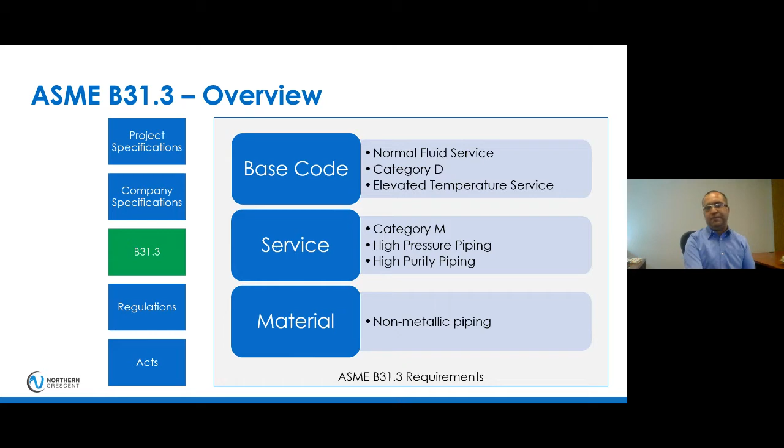Anything that is not fitting into any of these categories will go into the normal fluid service, and that will represent about 60 to 80% of what we are dealing with. There are very few services that will fall in category M, very few that will fall in category D, and so on. So the majority of requirements applicable to normal fluid service, category D and elevated temperature services are lumped together and put into the base code. If we look at it the other way, we can look at the way the code is written.

So everything that is in chapters 1 to 6, that is the base code, and that involves everything from definitions to the design, and design will cover the piping design, the components design, the joints design, and the stress analysis. Similarly, chapter 3 will cover the materials, which is mostly for impact testing requirements, and try to avoid any brittle failure so that the material fails in a ductile way, so that there is a warning for people to look at it and, if there is an imminent failure, they can do something about it. At least they're able to shut down the piping systems.

Then there is standards for piping components, and this is a fairly short section of the code. It's just a list of the fabrication and manufacturing standards that are referred to in B31.3 and are determined to have a consistent design basis with B31.3. So you can use these components without doing much more calculations or rating verifications.

Then there are fabrication, assembly, and erection requirements that are mostly covering welding, post-weld heat treatment, preheat, and any other fabrication-related activities. Then chapter 6 covers the NDE requirements, how you're going to do different examinations, what is the qualification of the person who should be doing the examination, and different types of testing, whether it's pressure, hydro test, pneumatic test, or initial service test. And there are other tests too. And then any appendices that have been referred to in these chapters will form part of the base code. And these chapters from 1 to 6 will cover most of the services, which are category D, normal service,

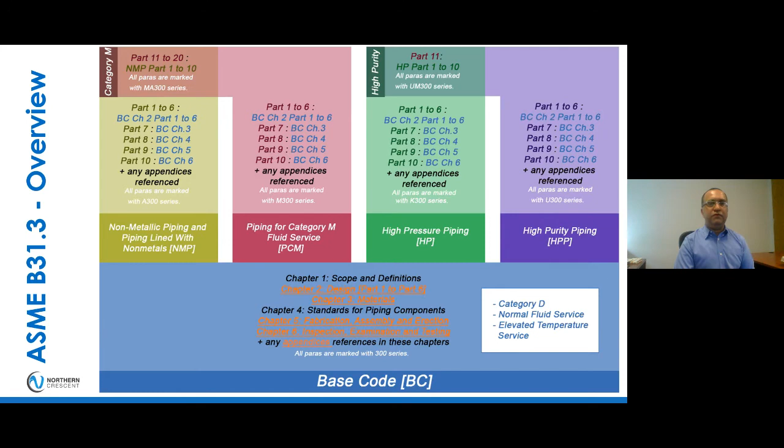Now, moving on to the other codes that you need to be aware of as part of complying with B31.3: B31P, which is mostly for heat treatments, and B31T, which is mostly for impact test requirements. Again, you want to avoid brittle failure of the piping systems. You want to give everyone enough time to react to a warning. You don't want to have an impact on a pipe and it cracks straight away while personnel are standing beside it and we have fatalities.

Now, B31E is a slightly dated standard, but hasn't really made it into B31.3 yet. That's mostly around seismic design for above ground piping systems. B31J now primarily covers all the inputs that we really need in stress analysis software for stress intensification factors and flexibility factors for components such as tees and, say, weldolets. Those are all covered in B31J.

And then there are some newer non-metallic piping codes such as B31 NM1, NM2, and NM3. Those cover everything that B31.3 Chapter 7 covers, but these codes are much more detailed than B31.3 Chapter 7 right now. In due course, you may see that they may be referred to in B31.3 in the next code revision or so, and then eventually replace B31.3 Chapter 7 in further revisions.

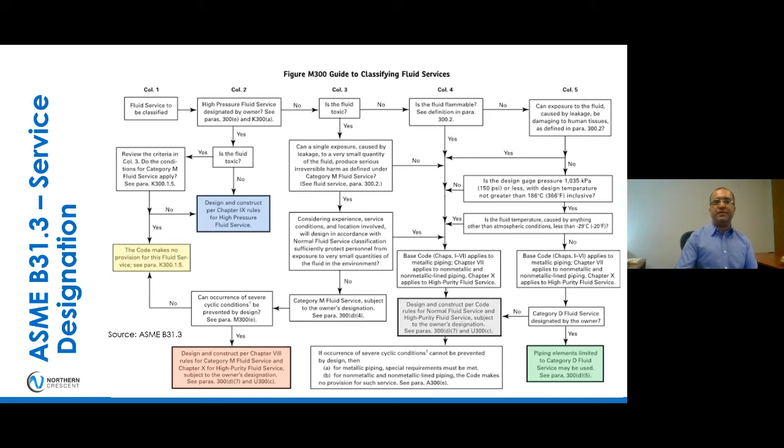Now, if we assume that somebody is just opening up an operating company and they want to do a new project, this is what tells them how B31.3 drives the conversation around requirements for different things, whether they are looking for a piping class, why the piping classes are needed, why stress analysis is needed, and why corporate specifications are needed.

You can see from this overall map that where you will start is with 2 things. You're probably going to start with a fluid service because you know that maybe I have an emulsion in my facility that I will be processing, or a gas. And you will probably have an idea about what kind of material you're going to use, whether carbon steel or stainless steels and those kind of things. And those are going to drive the conversation.

You know the fluid service, you put it in a piping class. Similarly, you know the material, you can then do the calculations for pipe, and then you can select the wall thickness. Again, you can put it through to the piping class. And similarly, you will have different fittings. You will have fittings that take the rating from your pipe wall thickness. That is your tees, your elbows, your reducers. And if they are made to B16.9, which is listed in table 326.1, it's a listed component, and you can just put it in your piping class.

Similarly, you can have fittings with rating, which could be a valve or a flange. If it's listed, you can just put it in a piping class. And you can have other fittings, for example, maybe a miter bend, a closure or maybe a specialty flange. There are some requirements given in paragraph 304.2 to 304.6. If it falls in that, you can just design to it. As long as it's a listed material, you can just put it in piping class.

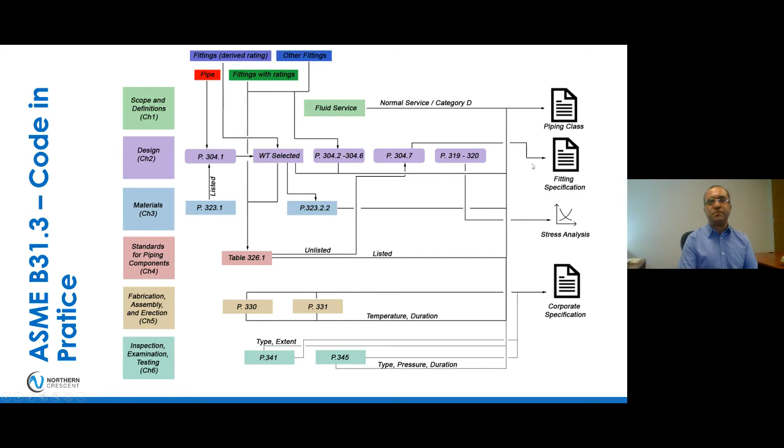Now, if any of these things is out of date, then I will request you to have a look at that, if any of these requires updating, because maybe the last time we did it, the piping class was 2010, and now there may be some significant changes between then and now. So with that, we will move into the B31.3-2020 changes.

The first thing is, again, related to the listed and unlisted components, things that we were talking about. So listed in any context, whether it's materials or components or valves, listed would mean that there is a standard listed for it, whether it's a material standard or a design standard listed in B31.3. It has a consistent basis with B31.3. If it's an unlisted component, that means that the design basis is not given in the code,

and these are unlisted valves. Just for completeness, I have given here all the list of the valves that are already listed in B31.3. So B16.34, API 6D, 600, 602, 608, 609. These are most likely to be the valves that you will be using. If you're using an instrumentation valve, maybe MSS SP-105.

And what really the change is, is that before there was a provision that if you have a valve that looks like a B16.34 valve, you can use one of the methods that's given in B16.34 and determine the pressure rating, because at the end of the day, the owner, the designer, is just looking for what this valve is good at for a certain temperature, right? So if you're going to 100 degrees C, you want to know how good the rating of the valve is. Is it good for 200 psi or 2000 psi? And that is now, I think, overridden.

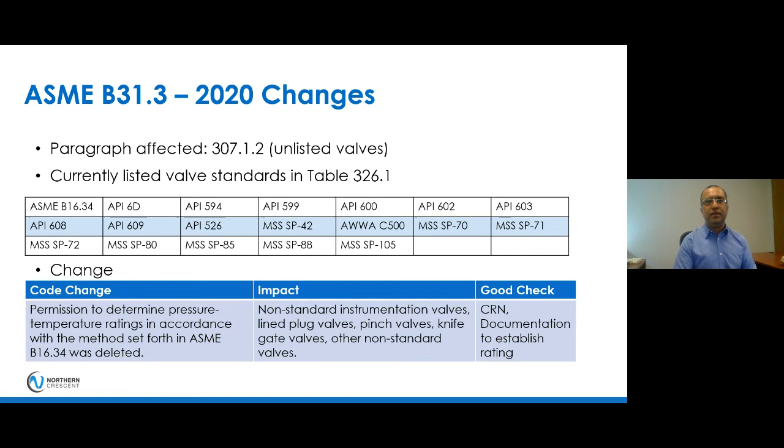Moving on to the other significant change, that is SIFs and flexibility factors. So right now, B31.3 has Appendix D, and whenever we do stress analysis, you will think about modeling a pipe. You model that pipe, and it's a cylindrical shape. It's simple, but when it comes to branches and other fittings, the simple models like Caesar and AutoPIPE need to know exactly how to deal with them.

You can think about SIFs and flexibility factors as imaginary numbers that represent the stress intensification of a component as compared to a pipe. Like how quickly it will fail if you are putting the same pressure and temperature on the pipe versus that fitting. If it fails much quicker, then you're going to say, well, this is failing 3 times quicker. So you're going to give a number which is probably 3, right?

And similarly, in order to correct maybe too much over-conservatism, you have flexibility factors where these tees, for example, have a certain flexibility. They may not stay rigid right in the middle. They will most likely be flexing when you put the loading on them. So those flexibility factors modify the rigid behavior of the piping system by a certain flexibility. So with these two combinations, you are able to accurately predict how the piping system is going to behave in a stress model. So the stress model is representative of your real life piping systems.

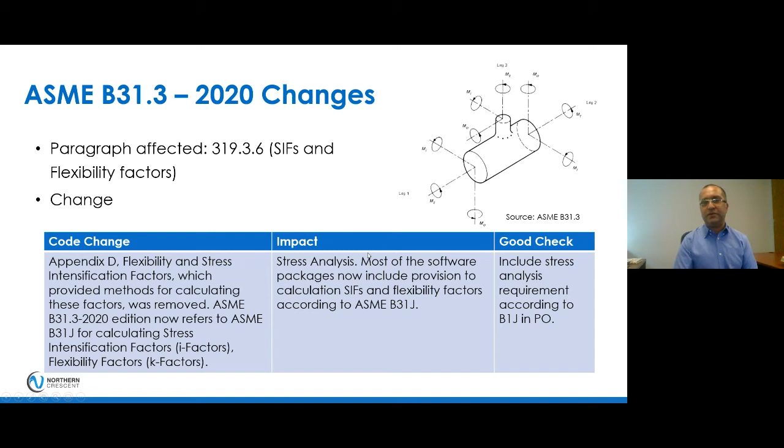The other, I think this is the most significant change, is impact test requirements for welds. There have been some background discussions around whether the impact test requirements for A106 and A105 are adequate or not, and from a printed book point of view, there is no change in how you were using A106, A105, curve B materials in 2018. Where things have changed is before, when your design temperature was warmer than the minimum temperature in the code, whether it's a straight temperature given in Table A-1 or given in a curve in Figure 323.2.2, you would be able to use the filler material and weld material. You do not need an impact test of that unless the temperature was colder than -29.

And the only exception there was if your consumable that you are using is already impact tested. So if your consumable is not impact tested, the one that you are using for maybe welding A106, now the limit is -18. And because the limit is -18, there is a good chance that you may need to do an additional PQR on that welding procedure to ensure that the -29 design stays. So you are not going to do an impact test at -18. That's the limit. You're going to do it at whatever your

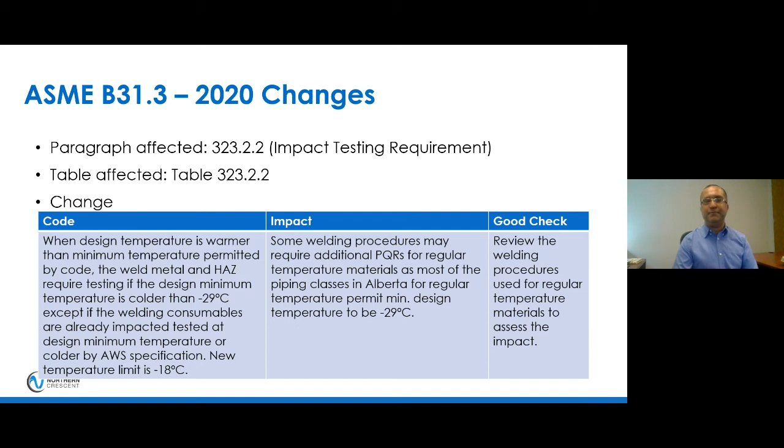design minimum temperature is. And most of the piping classes right now, for regular temperature in Alberta, are designed for -29. They're not designed for -18. So if you want to not change your piping classes and you want to keep those because they have been working well for you, then basically you need to add, not change completely, but add a PQR in your welding procedure that qualifies that welding procedure for -29 if the filler metal that is being used is not already impact tested by their AWS specification.

The other one is, again, related to the PQR. This is actually the other way around. This has made it much more streamlined. So in table 323.2.2, there was a number of tests for the fabricated welds, or you can say the field welds. Those number of tests, the requirement for how many test specimens you need through thickness, were different than ASME Section 9. So you could have a PQR that is done to ASME Section 9, but you may need yet more test coupons to qualify the same weld thickness that you're qualifying in ASME Section 9. You may need more specimens for that.

And it was felt that ASME Section 9 requirements were more than adequate for impact testing too, as they are for the weld thickness. So we can use ASME Section 9 thickness, and it took some time, but eventually we got there, and now they are the same. Now, if you are doing a welding procedure compliant to B31.3, you just need to follow ASME Section 9 requirements for weld thickness coupon and impact thickness coupon. So they're much more streamlined. If it was being missed, now it's not a concern, but if it was being done, now it's probably going to give some savings.

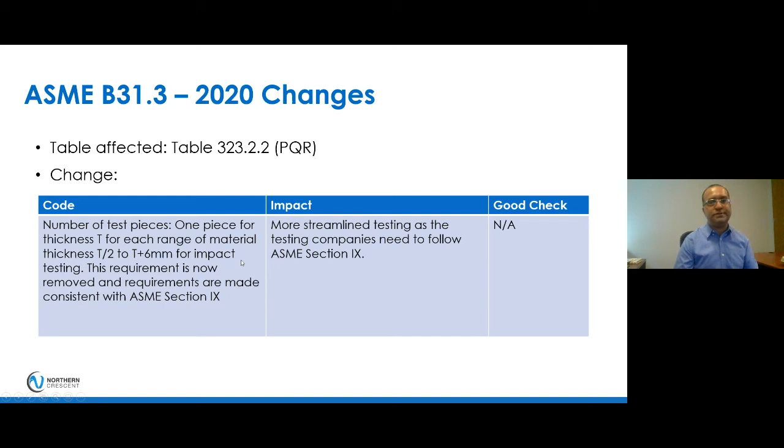Another, I think, is a finer detail kind of change. It is a difference between the socket weld flange versus socket weld fitting minimum code requirements. So in 2018, it used to say typical details for figure 328.5.2b. And it used to say minimum welding dimensions for socket welds. And both values are different. This is 1.09 of the nominal wall. This is 1.4 of the nominal wall. Now, that has caused some confusion that the actual minimum code requirements are these, and this is just a typical detail. And if you do this weld of the same dimension as this, then this weld is okay.

So now the code has taken a clearer approach, and basically what they have said is this is also now reading as minimum welding dimensions for double welded slip-on and socket weld flanges. And again, if you have borrowed this requirement from B31.3 into your corporate specification, you may need to review those. Other than that, if your corporate standard for fillet welds is already 6 millimeter or thicker, and it already meets both of them, then we are good. We are not going to be making any changes.

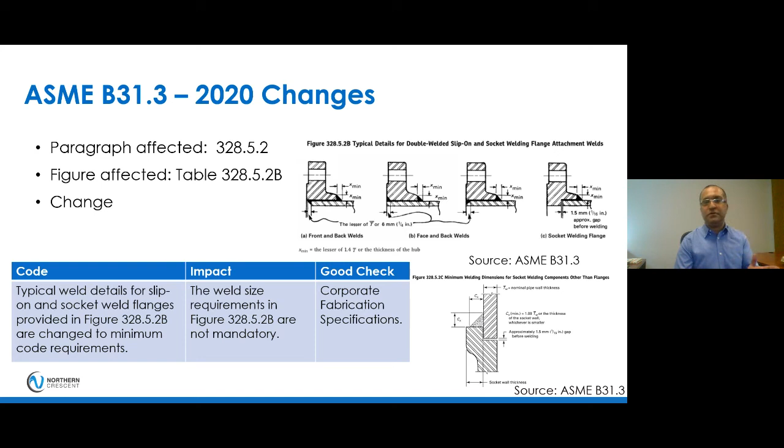There are, again, nice to have changes at this point in time, not mandatory changes, and those are regarding preheating and post-weld heat treatments. And now, again, as I alluded, there is a B31P standard for heat treatments available. You can use that. It is very detailed for preheat and post-weld heat treatment requirements. In terms of real changes for P1 materials, not much, but it is just a good guide. If you were lacking some details around fabrication, preheating, post-weld heating and generally around welding requirements, this document is a much more detailed and direct document. Again, if you want to incorporate those into your corporate welding procedures, you can do that.

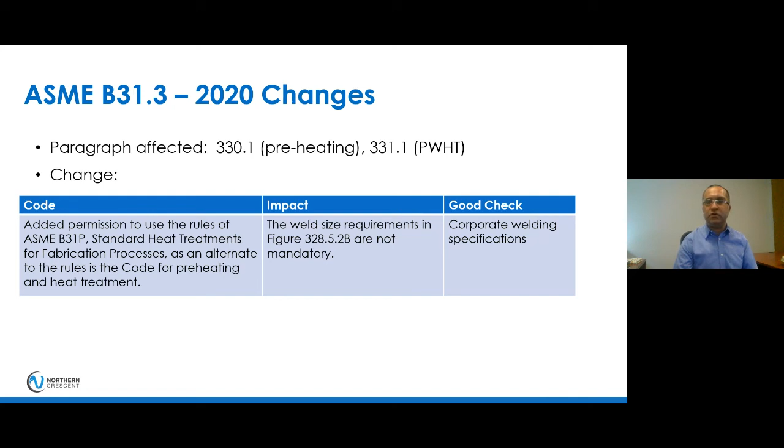A couple of other changes. These are not base code requirements, so there is a significant change around the high pressure piping section of the code, and basically some of the allowables for some of the materials have gone from 0.67 to 0.8 of SMYS, and that's just to make them consistent with ASME Section VIII Div 3. Similarly, the fatigue requirements have been simplified.

There were two methods given in the code in 2018 and before: the S-N approach, which is stress versus number of cycles, just a curve, and the other is a fracture mechanics one. You could use either. It was felt that the S-N approach is good enough if you can show and ensure that there is a leak before burst mode for this piping system, and if it is, you can use a simpler approach and you don't need to worry about the fracture mechanics.

Now, let's look at some of the no changes. The design basis in the base code hasn't changed. The design equation hasn't changed. Allowable stresses for the P1 materials mostly used in upstream haven't changed. Testing requirements for pressure test haven't changed. Post-weld heat treatment requirements haven't changed. And there really haven't been any impact test requirement changes to A106 and A105. So far, I think we are in a no change category.

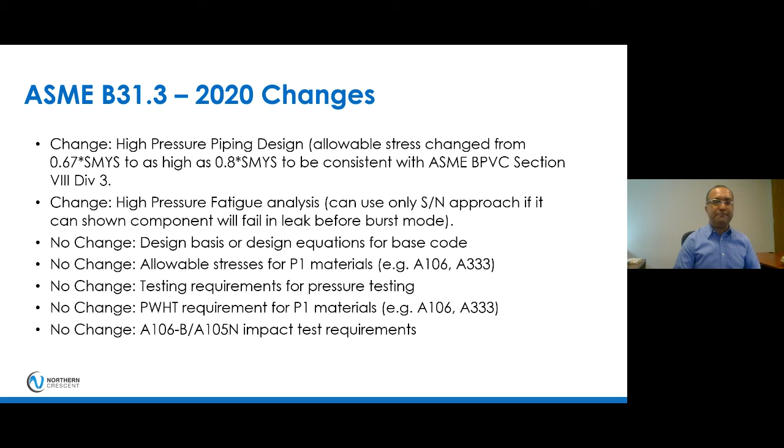So if we are looking at what this all means for you, basically there are going to be minimal changes expected for your piping classes. If you verified those to 2018, you have documented proof that everything was done and checked, so you can just maybe add another memo and say no changes. You may need to review your corporate welding specifications to ensure alignment, whether it's the PQR or weld testing for the PQR at minus 18 degrees C. Those may need to be looked at in 2021, because the code hasn't really come out, and it will take some time to get up to speed.

I would say that in your purchase order, you start using B31J. It's not a cost adder. It will save you. All the software that shows compliance to B31.3 already has this incorporated. Caesar and AutoPipe already have these requirements built in right now. You can just tell them use B31J, don't use Appendix D, it's going out. So if there is a design project ending in 2022, it will save you some grief if somebody starts doing audits.

Similarly, if you have service specific or non-standard valves used in your piping systems, just make sure with those valve manufacturers that their ratings are not determined using the B31.3 2018 provisions for unlisted valves. And if they were using that, then you need to get the updated documentation to make sure that you have the basis to use those valves for that rating.

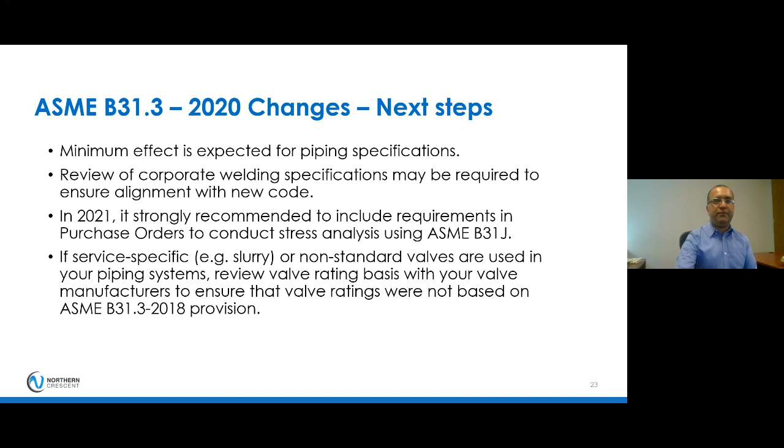With that, I have come to the end of this webinar. Now we go to the webinar poll that we had. At that time, we had about 21 responses. Overwhelmingly, everyone has voted for quality of engineering work products. I think that really drives the point home that if you have a quality engineering work product, it leads to less changes in construction and in later stages of the project, and that will probably drive cost efficiency for the overall project as well.